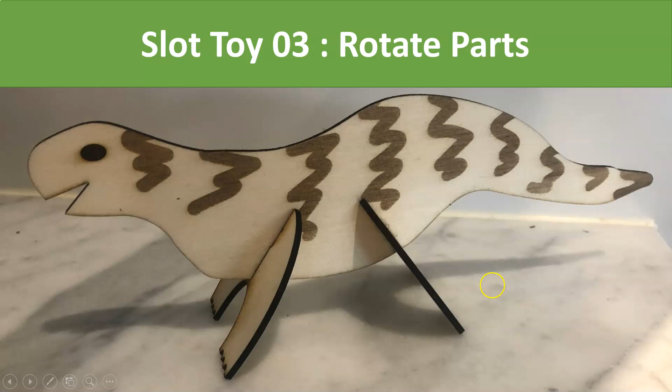Slot Toy Tutorial 3, Rotating Parts.

A rule that exists when you do physics, and it's to do with electrical current, is called the right hand rule. If you hold your right hand with a thumb up and follow that line up, and look at the way the fingers are curling around, that's the rotation you're going to get around that line, which is the case of a magnetic field going around a wire.

But in our case, when we draw a line in Onshape, we can rotate our parts around that line, and we can figure out which way we're going to draw our line based on the right hand thumb rule. So during this exercise, you're going to have to hold your right hand thumb up, out, or in a certain direction to figure out which way you're going to have to draw a line in order to rotate it.

Let's look at this by example. So last time in Onshape we were up to Slot Toy version 2. I'm going to right click on that and copy the workspace, and we're going to create version 3. Version 3 we're not going to use, it's just a practice.

So let's go into version 3 and see what we do. I want to rotate my hip so that it's at 90 degrees to the dinosaur. So if I curl my thumb the way I want my fingers to rotate, then the thumb will point in the direction that I need to draw a line. In my case, that's straight up the screen.

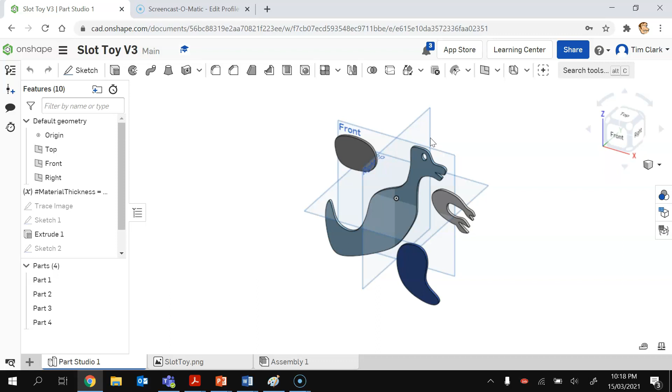So I'm going to draw a sketch on the front of this particular hip joint here, and draw a line, and make it a nice construction line. I'm going to zoom right up on my hip joint, and draw a line that definitely goes straight - you'll know it's going straight because it turns a little bit orange and has that little up and down line that appears just down there in that white section. You can see that there. So I'm going to draw that, and that's going to be my rotate for my hip.

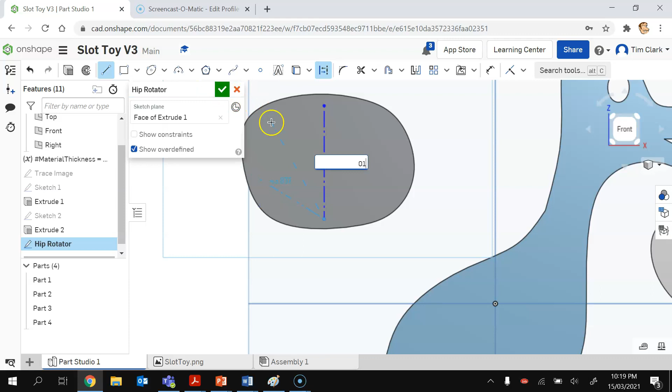So I should probably rename this hip rotator 01, because I might do several. So I'm going to press tick on that now. I've got my hip rotator.

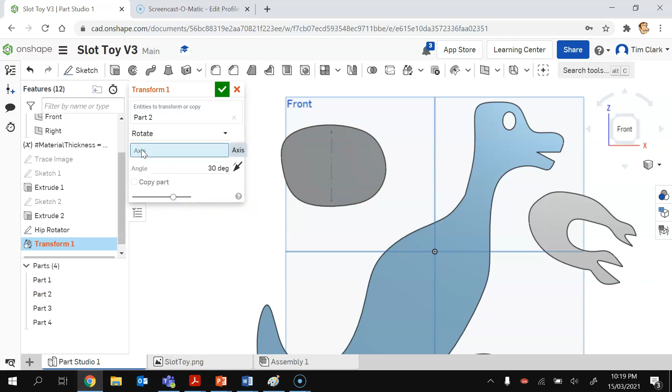So now I can use a special tool called the transform tool. I'm going to click on the transform tool, choose rotate. For entities, I'm going to click on this blue section here, and click on my hip, and rotate it around an axis. So I'm going to click on axis to make that blue, and it's going to be this particular axis.

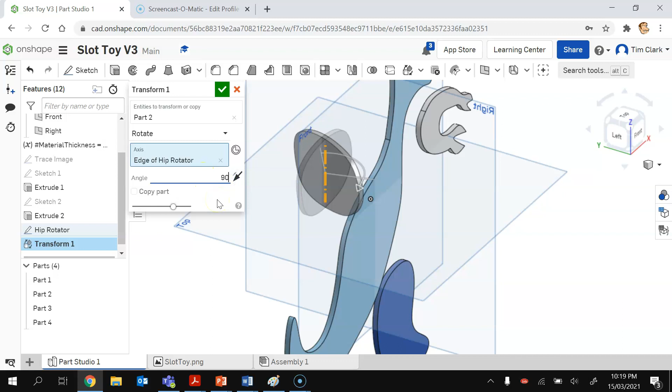Now you can see here that I can rotate it by dragging this line, and it's going to rotate around that line. So if I put my thumb in the direction of the line, you can see that my fingers are curling around the way it can rotate. In fact, if I hold my hand up on my right hand, that's the way the arrow is going to work. I want to rotate this by 90 degrees exactly, so I'm going to type in 90 here and press enter, and that's going to look good, and press tick.

I want to rotate my arms the other way, and you'll notice that the arms are already on a sort of a strange angle, so I need to rotate them along a line at this angle. So I'm going to draw a sketch here, and I'm going to draw up my line, eyeballing it around this way.

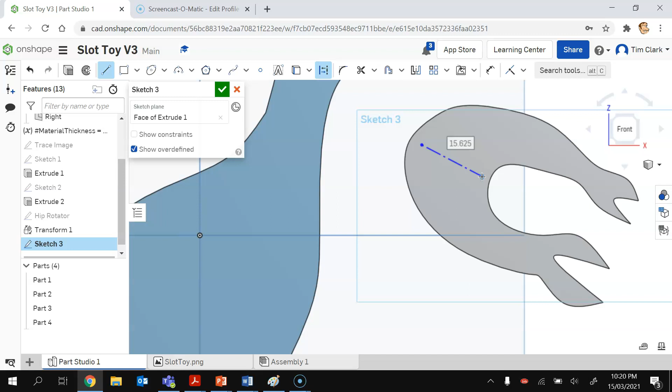Like so, and that's going to be a tricky one, but I'm going to rotate it around that line. So I'm going to use the transform tool and change it to rotate. The entity I'm going to transform is my arms, and I'm going to rotate it around the axis. So I'm going to click on axis and click on that line there, and you can now see I'm rotating it around that line, which is pretty funny.

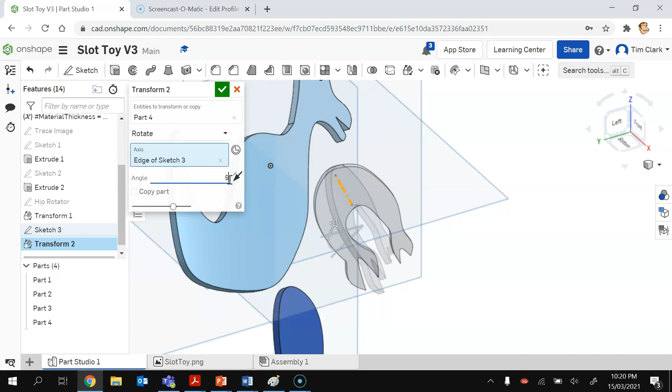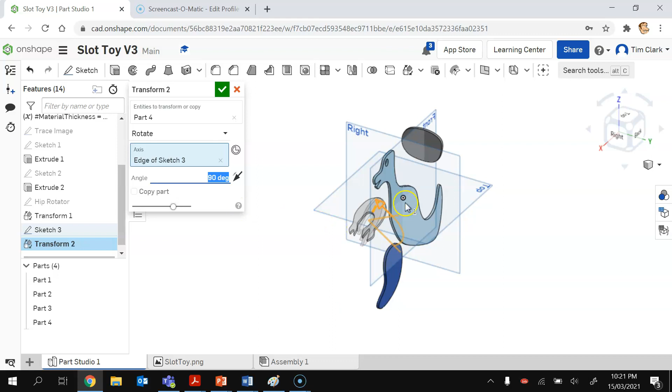But once again, pretty much everything needs to get rotated 90 degrees initially, at least anyway. So if I look at that, that's not right. It's a bit annoying, I'm gonna have to eyeball this. Yeah, I think it's 90 degrees. Yep, it is, it's 90 degrees. That's good, happy about that. So you see I've got my hip and my body and everything rotated.

Let's just say I want to rotate my leg a little bit. So this is really tricky. How do I draw a line out there so that I can rotate it around that line.

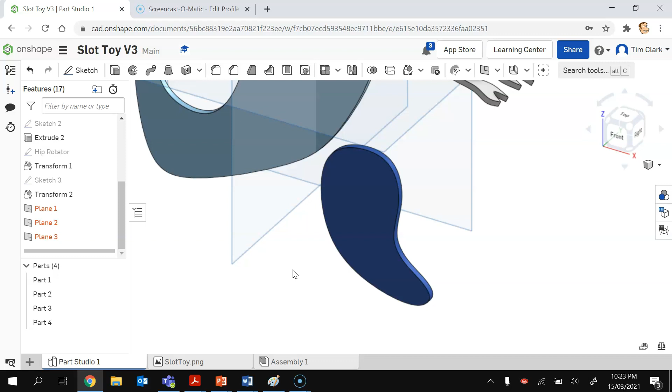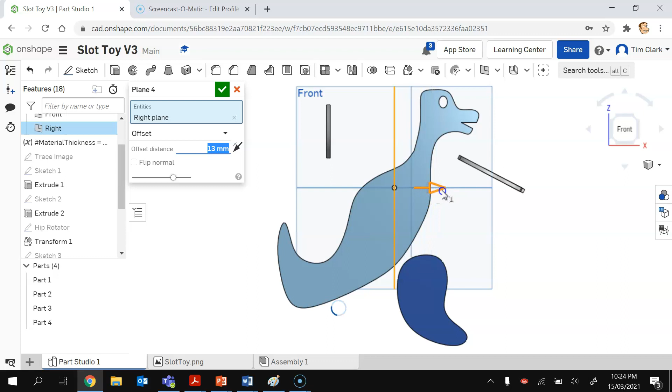The easy way to do this is to actually grab a plane, and it's going to be an offset plane, so I'm going to click on that one there, and it just so happens that this one lines up perfectly with where I need it to be, but I'm going to drag it so that this line is roughly in the middle of my object, and I'm going to press tick.

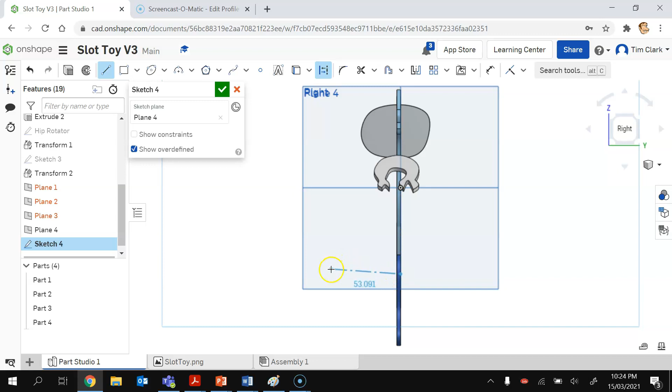So now if I look at this from an angle, I have something called plane 4. I'm now going to draw my sketch on plane 4, and it's going to be a line sticking out. Let's look at the right angle to plane 4, and I'm going to draw this line here, from about here, out here horizontal, like so, and press tick.

And now I'm going to basically rotate this using the rotate tool, transform by rotation, and I'm going to use the axis point here, and the thing I want to transform is that, and now I can actually rotate that leg a little bit, and I'll probably have it like, not too much, more like that, and press tick.

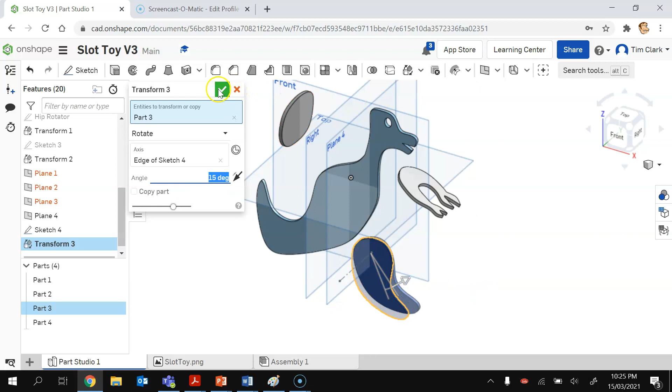So you can see that that's a bit of a complicated way of doing it, and it's tricky to do. Most people try and avoid doing that type of rotation, and you usually can, but if you need to, you can do it by creating a plane in the middle of your object, create that plane as a normal to that item, and then draw a line out and do it like that.